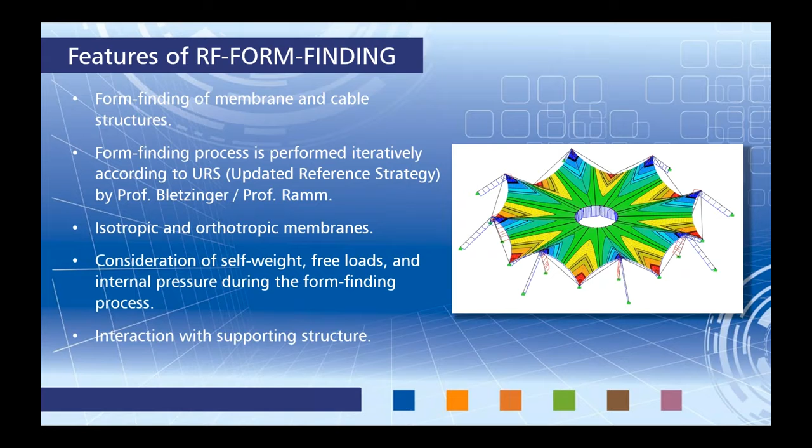Our other add-on module, RF-CUTTING-PATTERN, uses the minimum energy method for a very accurate cutting pattern. So essentially, we're turning this 3D membrane element into a 2D cutting pattern via the minimum energy method. We can also take into account uniform or linear compensation by warp or weft directions, meaning typically these membranes are going to be stretched when they're applied to our structure. So for the 2D cutting pattern, we can take into account that compensation.

We can also apply these compensations for boundary lines around the 2D cutting pattern, so it doesn't necessarily need to be in the warp and weft directions. We can also allow for different allowances, such as for welding and for boundary lines. Welding for overlapping members, maybe we need some additional material. Boundary lines for the upper and lower portions of the 2D cutting pattern as well.

There is adaptable data organization, meaning even after we have performed the calculation for our 2D cutting pattern, we could go back and easily add in some additional material for welding and for those boundary lines without having to recalculate the 2D cutting pattern.

And lastly, I'll show you how to output the cutting patterns both graphically within the RFEM printout report, as well as tables. And these tables can be exported directly to Microsoft Excel for further sorting. And lastly, we can export them as a DXF file, open them up in AutoCAD, and show you how to utilize the cutting patterns this way.

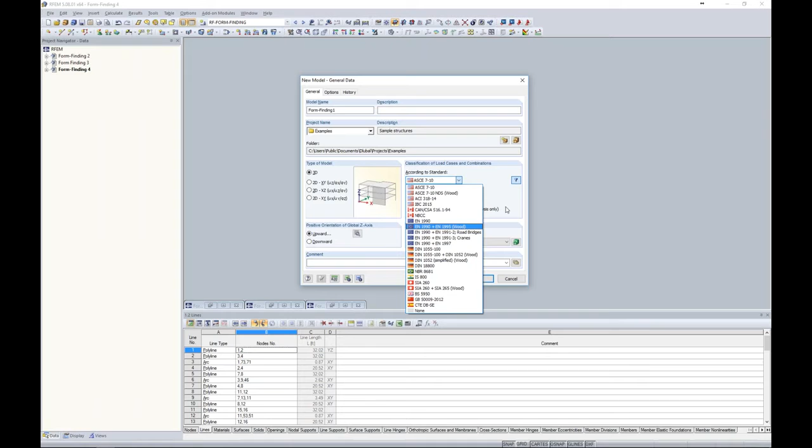So you can see from my drop-down box that I have the ASCE 7 load combinations. I also have our Canadian standard, Eurocode standards, and many other international standards. When I have this checkbox checked, then the program will automatically create those load combinations. You can see that when I uncheck this, then I can manually put in those load combinations if I'd like to as well.

It's important under the Options tab when we're utilizing RF-FORM-FINDING and RF-CUTTING-PATTERN to check on these checkboxes. Otherwise, we won't have those options within RFEM. So when you're checking out the form finding of our membrane structure, it's important to check these checkboxes, and then we can launch our model.

So up pops RFEM. And you can see here that we have our basic graphical display here in the center. We have our tables to utilize down at the bottom. Over on the left is our project navigator, which again just controls some of the input data. We'll also see our results available here. And lastly, we have all of our tools up at the top. And today we'll be using all of these options.

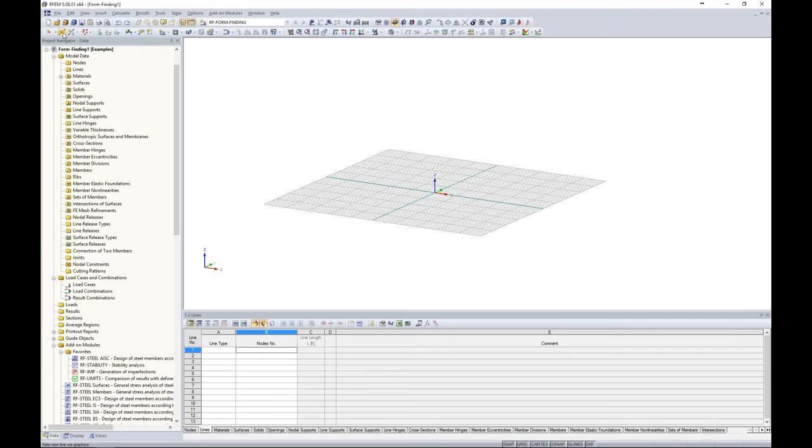I want to begin with drawing a basic line element. So up in my toolbar, I can choose to draw a new line, and you'll notice that we have many different line types. And you'll hear me say this quite often today, that we have a lot of AutoCAD-like capabilities within the program. So things like complex geometries, which is quite common for membrane type structures, is really no problem to model within RFEM. So hopefully you'll get a glimpse of that today.

To begin with, we are just going to do a typical straight line here, and I could draw this graphically in my graphical viewport over here on the right, but I can also just enter in a couple nodes here. So for example, 0, -5, 35, then I go down and click apply, and I can enter in my second node at 0, -30, and 15. And hit apply. So now you can see that we just have this line element in our 3D view over here.

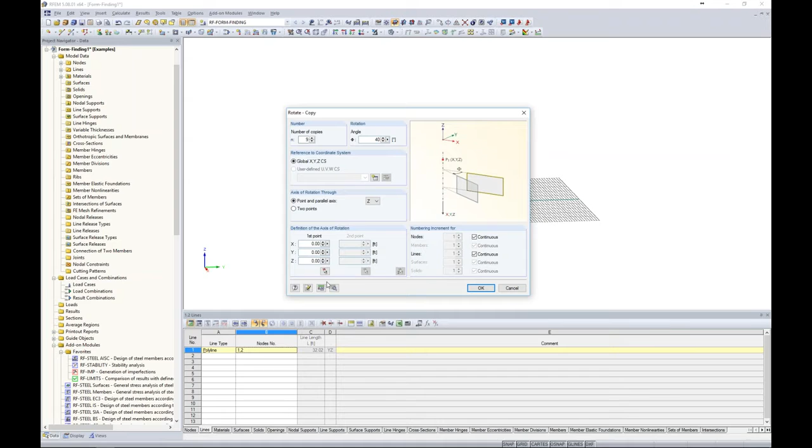I'm going to select this entire line and the nodes and use my rotate copy tool. So here I can specify that I would like 8 copies at 40 degrees, and I'm rotating everything about the origin 0, 0, 0. And even more so, we have a nice feature here down at the bottom. So if I click on this expanded settings, I can create lines between my copy nodes. Even more so, I can create surfaces between those lines. So now when I click OK through all of these dialog boxes, I have my conical structure with just a few clicks of a button.

Now turning this into a plan view, and maybe I turn off my grid down here at the bottom, I'd like to create cable elements spanning between my longitudinal lines here. Now a cable element certainly can't be constructed in the field as an arch type line like this. So we need to create straight lines here. Well, how to quickly do this?

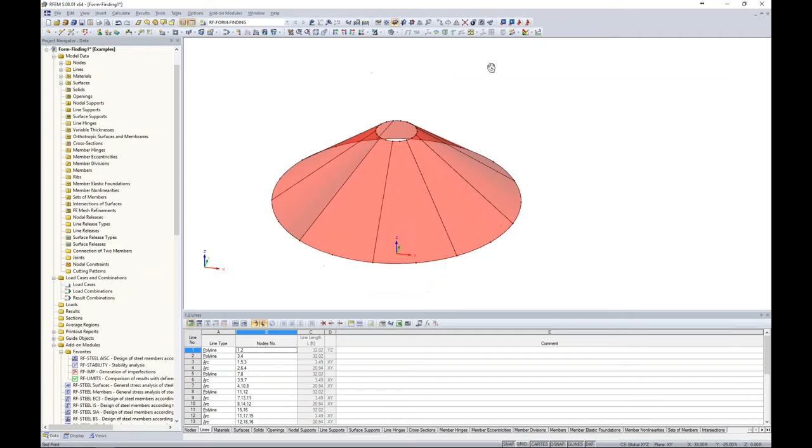I'm going to turn this into an elevation view, and I'll highlight all of my members down here at the bottom. Now you'll notice that my table 1.2 lines shows me exactly which lines I have selected in my graphical view. So using this feature within the table, I can show the selected objects only. So these are only my lines selected at the bottom of my structure. The line type right now is set at arc. I'm going to change this to polyline. Then using the F7 key, I can quickly copy that same setting down for all of my line elements here.

Now, if I turn this back to my plan view, you'll notice that these are now straight lines, but I still have this node in the middle that I'd like to get rid of. For this, I'll turn this into wireframe view, and now holding down my control key, all I need to do is to graphically select all of my nodes here. Then I simply click the delete key, and I have these straight line elements.

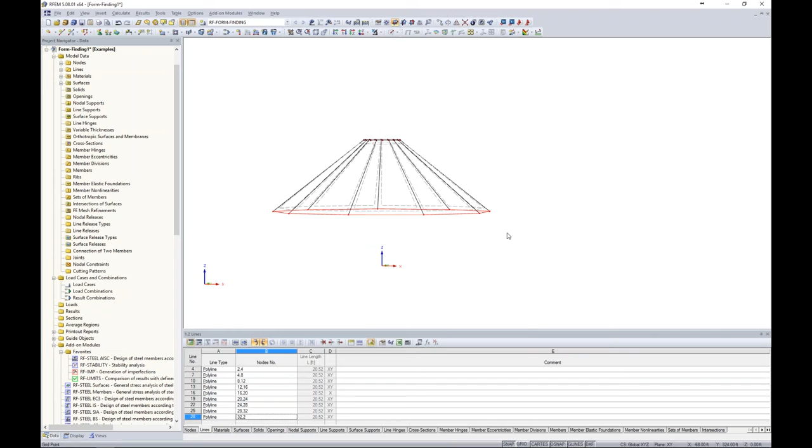So with these line elements, I'm again going to select them graphically down at the bottom, and I'm going to right click to edit the line. Now every member within the program is created with a line element underneath it. So we have a nice tab here up at the top called member, and we can create a member availability. Now up pops our new member dialog box, and we can create a new cross section.

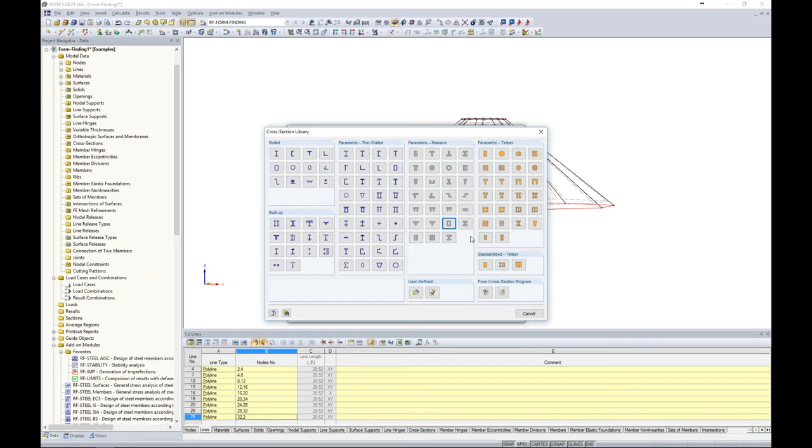So here I launch my cross-section database, and you can see that we have many different cross-sections, such as our rolled sections, built up, thin-walled, massive for concrete sections, timber. For these elements, I'm going to utilize the solid sections here. And we have our filters over on the left, which you can see some different producers maybe that are applicable to the Eurocode design. We also have our AISC database.

Now I can scroll all the way down to the bottom to choose a 1/2-inch diameter cable element. My default materials within the program are 4,000 psi for concrete and steel A992. I'd actually like to create a new material here, and my material database is brought up. This looks similar to my cross-section database as well. I have my filters over here on the left.

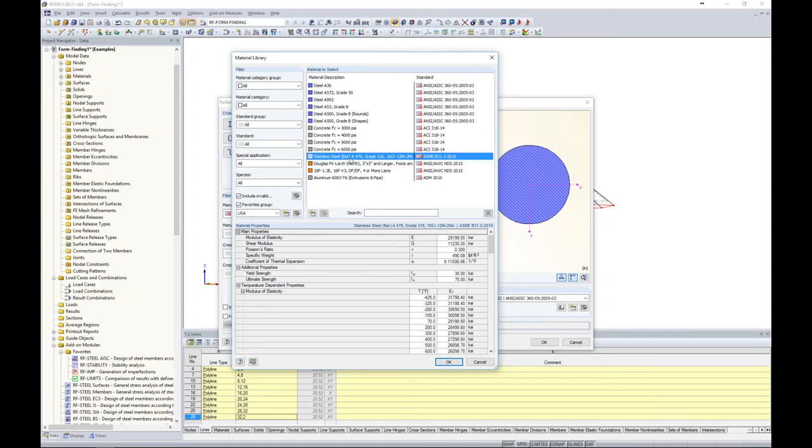So you'll notice that under material category, I'm going to change this to stainless steel. Now I have the ASTM as well as Eurocode down here to select from. Looking at ASTM, I have a very long list of all of my stainless steel materials that I could possibly think of. We can also utilize our favorites list, which I created a favorites list called USA. These are just common materials that I use quite often for projects, and you'll notice I added stainless steel A479 here. Well, I can select this material and click OK through all of these dialog boxes.

Now, the member type right now is set at beam. I actually want to change this to a cable member. That's the element that we're trying to model here. So now I can open up the member type. Now, this is available because I've activated that RF-FORM-FINDING add-on module. Otherwise, you wouldn't see this option available. Here we have the cable parameters for form finding. And with this, we either have geometry or force.

With geometry, we can set a target cable length or a target cable absolute sag, relative sag. With force, we can set a force in the cable or a force density. So these are the properties that we'd like to see after the form finding process is complete. When we're choosing geometry, this is maybe relevant for border cables and membrane structures, such as what we have today. The force is an option that's maybe relevant for cable webs. For our example, we'll choose a target cable absolute sag of 1.5 feet, and I can click OK.

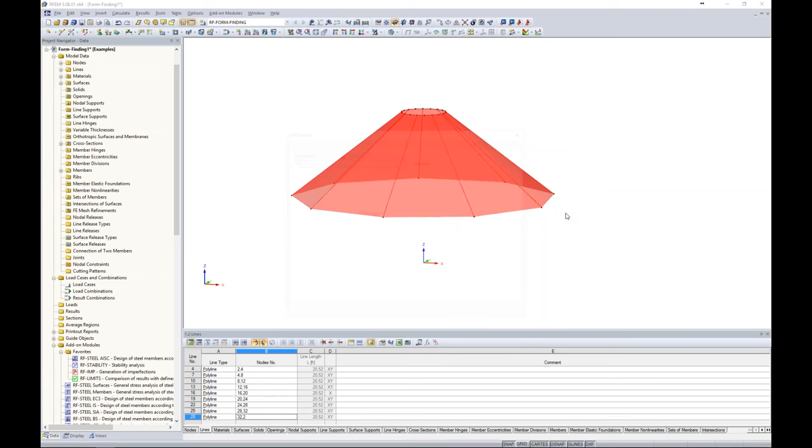So now that I have set this form finding capabilities, I click OK. And now we have the cable element specified down here at the bottom. So I want to turn this back into the rendered shape to show you guys that right now my surface elements are red. That means that there probably is something missing within the program that is trying to flag me. Well, if I highlight all of my surfaces, I right click and go to edit, you'll notice that my stiffness is set to null. Null means nothing. So we need to put in these material properties as well as our form finding process for our surface elements.

So the first thing I'm going to do is use my drop down to select membrane orthotropic. And here is where I'm going to create a new material. Now, membrane materials are not so straightforward as something like steel A36, A572, for example. This is something that maybe we get from the manufacturer, maybe we do our own testing on these material membranes. So when I go to create a new material, I need to first give it a description. And our material model by default is set to isotropic linear elastic. I actually want to change this to orthotropic elastic 2D. Now up pops my dialog box for my stiffness properties.

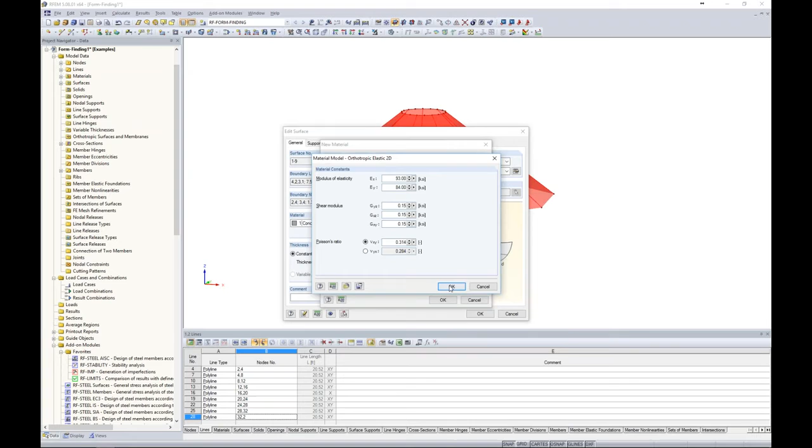So back in RFEM, we can simply apply those stiffnesses here. For example, it was found that EX is 93 KSI, our EY is 84. Our shear modulus is going to be the same in all three directions at 0.15, and our Poisson's ratio is also important at 0.314. Now I click OK. So we have now defined the specific material that we'd like to use for these surface elements. Now, similar to the cables, we'd like to edit the parameters of the stiffness. Again, these are options that are available, especially this form finding tab when we activate the form finding module.

The type we'll use here is constant thickness, and under my next tab, constant thickness, I'm going to set the thickness at 0.04 inches. Then I can click on my stiffness matrix to see those values here. Perhaps I'm interested in those. And under the form finding tab, well, this is the availability to define pre-stresses along the warp and weft directions with our form finding module. So you'll notice that we have two different calculation methods, both the standard and the projection. And this just comes from the general form finding method URS that I mentioned in the PowerPoint.

Standard is really used for membranes supported by points or arches or pneumatic structures. Pneumatic just means that they are air-supported structures supported by internal air pressure, which you can see down here is where we can define that internal pressure. Projection is used for conical shapes. So that's actually the type that we have today.

But just for example purposes, I want to show you what this form-finding deflected shape looks like by using the standard method to begin with. So you can see why we've chosen the wrong calculation method. So we want to define our forces, you can see down here, are defined according to the warp and weft direction. So this is the local X and Y axis.

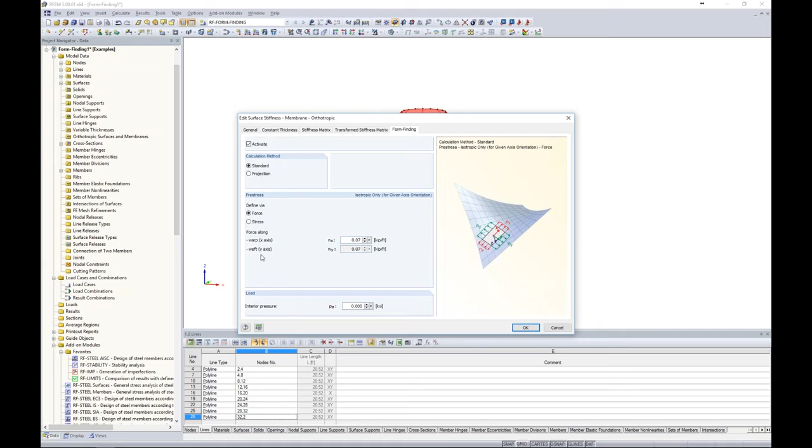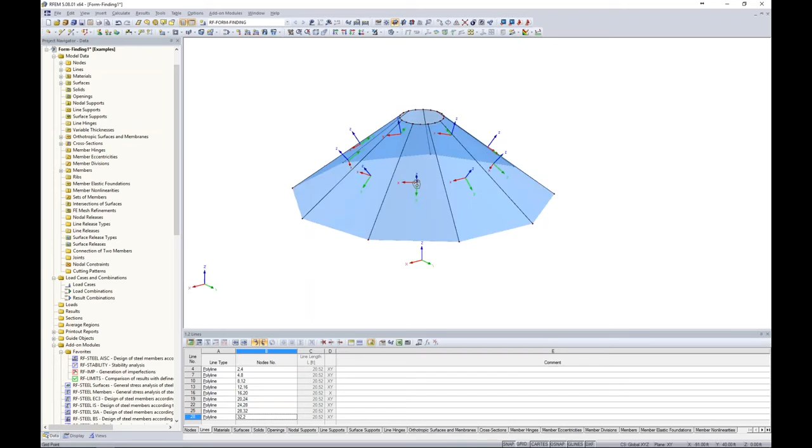Now, before I define these, it's very important that we go back to our model, and you'll notice my material is now blue because we specified these specific material properties, and I can right-click and turn on my local axes. Well, if we're going to define these pre-stresses according to the local axes, you'll notice all of my local axes are going in different directions. So this is not good if we're going to apply our pre-stresses globally to all of our surfaces, and yet they're going in different directions.

So how can we address this quickly without having to redraw all of our surfaces? Well, if I highlight all my surfaces, I right-click to edit them again. We have a tab called Axes here. Now Axes allows us to quickly rotate our local axes, and for example this third option down here, we can point all of our local axes direct to a line. Now this line can be a fictitious line within the model.

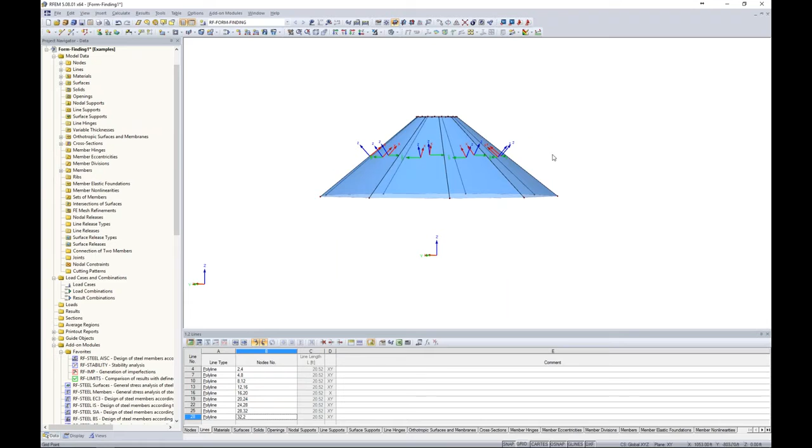Here for example we'll choose the origin as the bottom point, which is going right up the center of the structure, and our second point will be at the origin but at a Z elevation of 35 feet. So now when I click OK and I take a look at my local axes, all of those X local axes are pointing right towards the center of my structure. So this is very important when we're defining our pre-stresses for our surfaces globally here.

So now going back to our General tab and our Stiffness Parameters, under the Form Finding, here is where we can specify our force in the warp or the x-axis, and weft is the y-axis. This is also known as the longitudinal and transverse directions. So for NX, maybe we'll select 0.55 kips per foot, and we click OK.

So now that we've defined these pre-stresses, and I can turn back off my local axes, we'd like to run this form finding calculation. Before we can do so, we do need to support the structure somehow. Otherwise, we'll obviously get some type of instability. So just applying nodal supports at the bottom, I have my typical hinged support here. I can highlight over the bottom. I'll apply just a hinged line support at the top, nothing special here.

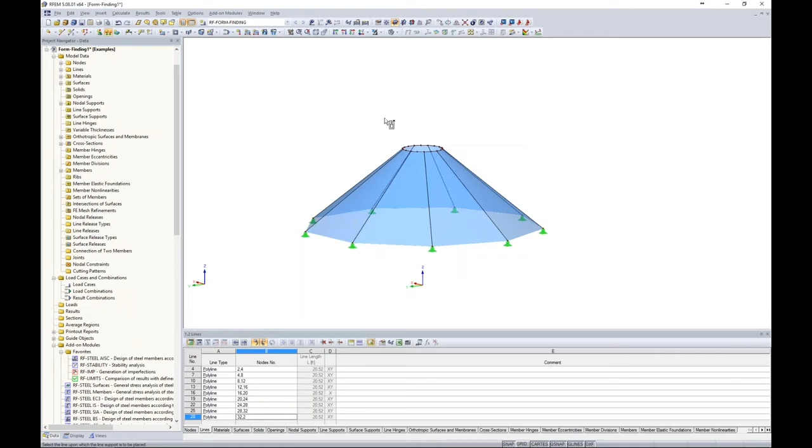So now with this RF-FORM-FINDING, we just click show results. It's asking me to start the calculation. That's fine. We're applying the URS method. Now remember, we are running the standard procedure now. So in just a few seconds, we'll get our deflected shape based on those pre-stresses. So as we can see for our conical structure, this is not the ideal shape that we would expect. So I think that should immediately flag us that, okay, we probably used the wrong calculation type.

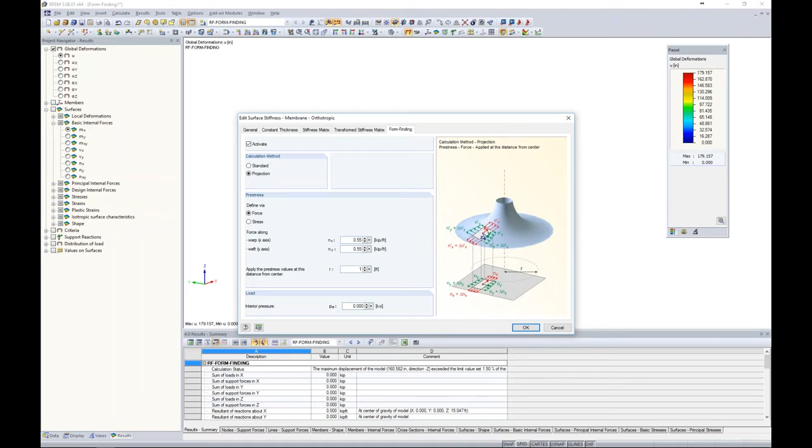So highlighting all of these surfaces again, we can right-click to edit it, go back into our form finding settings, and let's change this to projection. I need to redefine my NX and NY here. And it's also asking me where do I want to apply the prestress values from the distance from the center of the structure. We'll set this as 1 foot. I click OK. It's asking me to clear my results. That's fine. Now let's rerun the form finding process. So again, still applying those same pre-stresses, but we're using a different calculation type here to get our deflected shape.

And now we can see that this looks much better in what we would expect for our conical type structure. So what does this tell us? Well, in our results, which is now available in our project navigator over here, we obviously can see the global deformations in inches here in our contours, but maybe we're interested in the internal forces of our stresses here. So I take a look at my surfaces, and in particular NX.

Now looking at my contours, I see at the bottom I have a stress of 0.566. Well, this matches our pre-stress that we put on the structure for the form finding process, or very close to it. So that's great. That's exactly what we'd expect. Looking at NY, exact same scenario. At the bottom we have 0.53. We applied a 0.55 pre-stress, so that's about what we would expect.

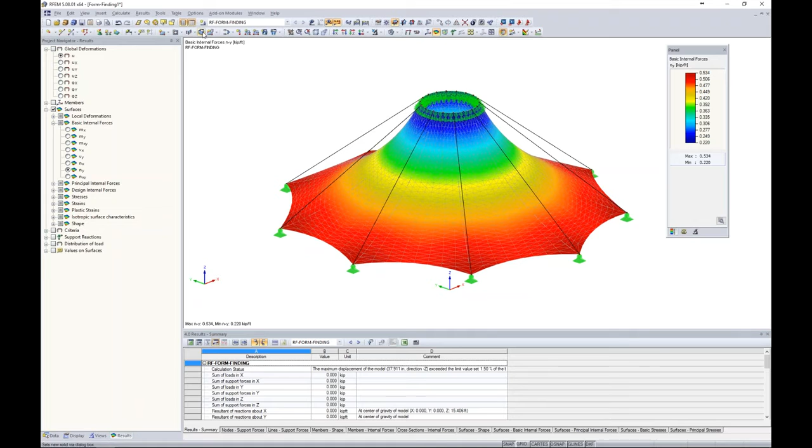Okay, so now that we have done the form finding process, it's time to actually apply some loads to this structure. Now, what we want to do is to maybe create a new load case here, and I can simply do this utilizing my tool up at the top, and I will give the first load case a description of dead load. Now, the action category is important because this tells us how we're going to apply these loads to the ASCE 7 load combinations, and in turn, which load factors should be applicable.

So we will keep the dead load for the action category. Self-weight is checked automatically for dead load, so this will account for our self-weight within this particular load case. For all other load cases, we'll leave this as unchecked so we don't account for it twice. We click OK, and now you can see that no loads have been applied to our structure yet, but using the new surface load, we can specify a load direction in the global Z,

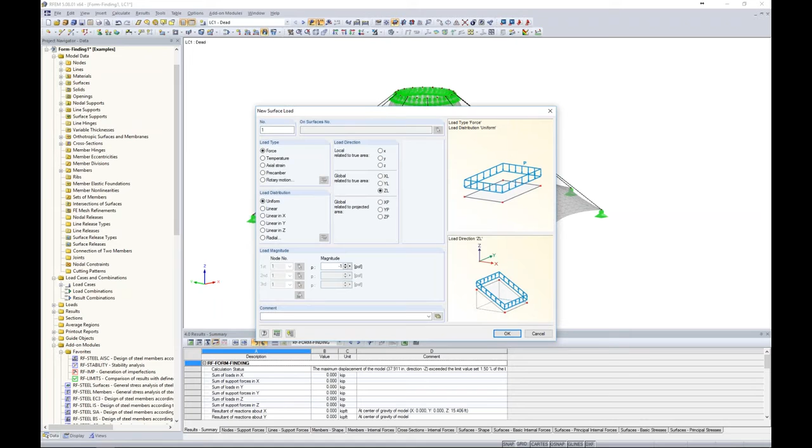and I'd like to apply a magnitude here. Now, let's say that this structure is just a basic canopy or something of the sort and really won't see too high of load. So you'll notice I have KSF, kips per square foot right now. Well, I can easily access my units and decimal places, and maybe I want to change my area loads to something more like PSF, for example. I click OK, so now I can apply -1 pound per square foot, a very, very small dead load to the structure.

I click OK, and then I can select all of my surfaces. So now you'll see that that dead load was applied to each surface. The hole at the top was taken into account. Everything was done automatically. Now, after dead load, we'd like to apply some wind loads. Now, wind loads for a conical type structure.

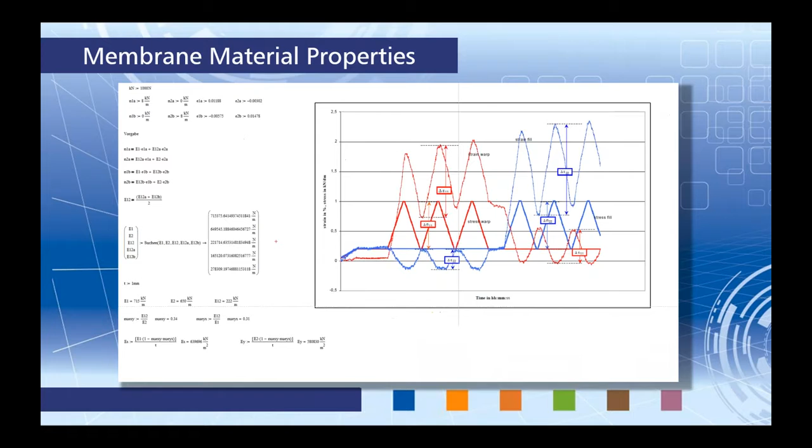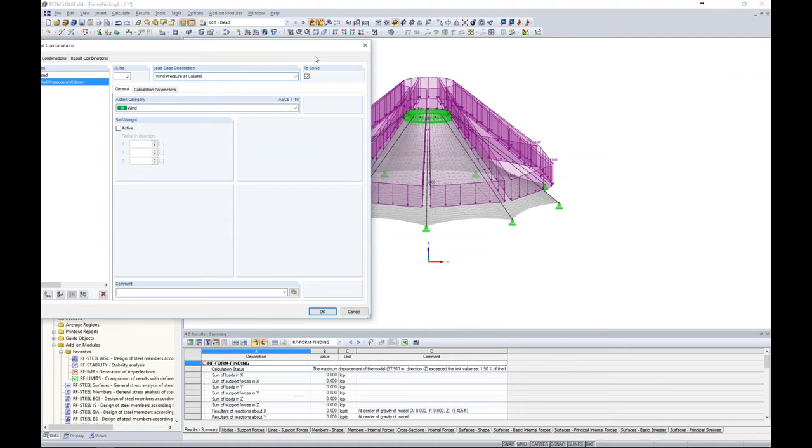I want to show you that it's actually not too complex utilizing some of the features in RFEM to take these different zones into account. So I'm once again going to create a separate load case here. The action category will be wind, and the description here will be wind pressure at column. Now I say at column because a little bit later on I will draw in 3 separate columns around our structure at 120 degrees. So this first wind load case will be that wind direction coming straight towards the column.

I click OK. So now that I'm in a new load case from my drop down here, I don't have any loads applicable right now. Putting this into elevation view, my first zone, zone D, from our table that we just saw is this front structure here, but it's actually 45 degrees around this front column. So what I want to do is I want to select this node down here at the bottom, and I'm going to use my rotate copy tool.

This time I'm only going to make one copy at 22.5 degrees. I want to make sure under my details here to clear out the settings I used before to create surfaces between my copied nodes. In the same sense, I'm going to do the same thing with my rotate copy tool in the negative 22.5 degree direction.

So for my wind loads, I previously used this new surface load, which will apply the wind load to the entire surface, which is not what I want in this condition. We have a nice feature here called free loads, which allows us to apply any different shape you can think of, whether that's circles, rectangles, or polygons, all to our surfaces. It doesn't necessarily need to encompass the entire surface.

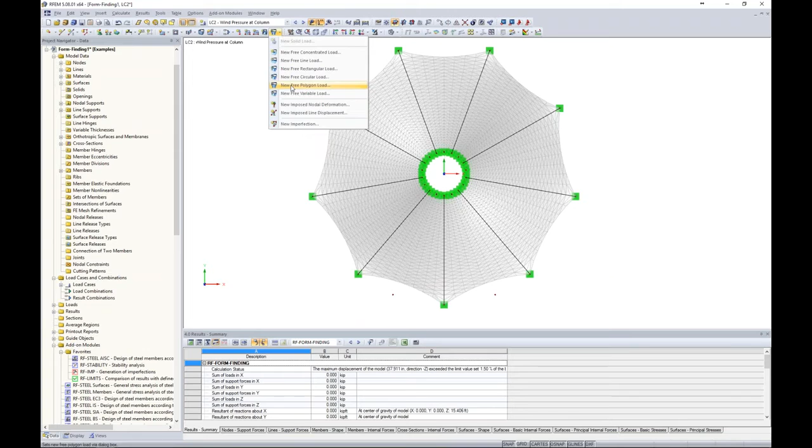For today, we will use a new free polygon load. Now for this, we just specify our surfaces. We can either select them graphically, or I can type in 1 through 9, or I could leave this as all. We're going to apply it in the local Z direction, which is normal to the face of the surface according to the local axes rather than the global.

The magnitude here I determined from that table will be -9 pounds per square foot. Then I just select graphically my different nodes that I would like to apply this wind load to. I click OK, and now you can see that this wind load pressure is applied to the front of my structure, but not on the entire surface elements here.

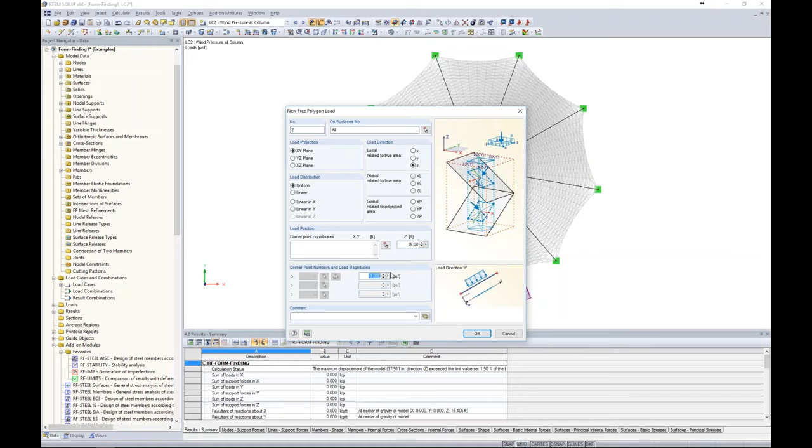Now, in the same sense, I'd like to do the same thing at the rear of the structure, but at 120 degrees. So I'm going to again use this polygon load here, in the local Z direction. I'm going to change my magnitude to 8 PSF, and then click on my different points at the rear of the structure. I click OK, and now we can see there is a surface load being applied to the rear of the structure. And I just realized that I made a mistake.

Looks like I applied this to surfaces all. It's the same thing - you can leave it as all or type in surfaces 1 through 9, but you can see the display is a little bit different. It goes back to being projected. We can project down through multi-level story buildings as well. But just for display purposes, I'm going to select this as all so that it's very clear this is a suction pressure at the rear of our structure.

Now, in the same sense, I'd like to apply my other zone on the right side of the structure. So we again use a polygon load, typing in surfaces 1 through 9 in the local Z direction. My magnitude changes to 12 PSF - this is my highest load around the circumference of the conical structure. Then I select my points.

Now, something to note here, I would like to encompass half of this surface. The program has snap settings, just like what you would see in AutoCAD, so it recognizes that this is the midpoint of that surface. Instead of creating a new node like I did previously, I can just use this snap point. I click OK, and now you can see we have that suction on the right side.

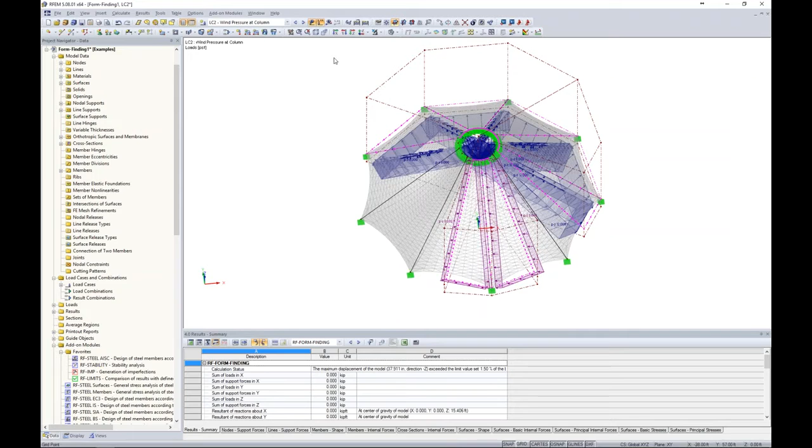Now, lastly, we have a small zone here to do the exact same process. Surfaces 1 through 9, my magnitude is changing to 5 PSF, and I click on my remaining nodes on the right side of my structure.

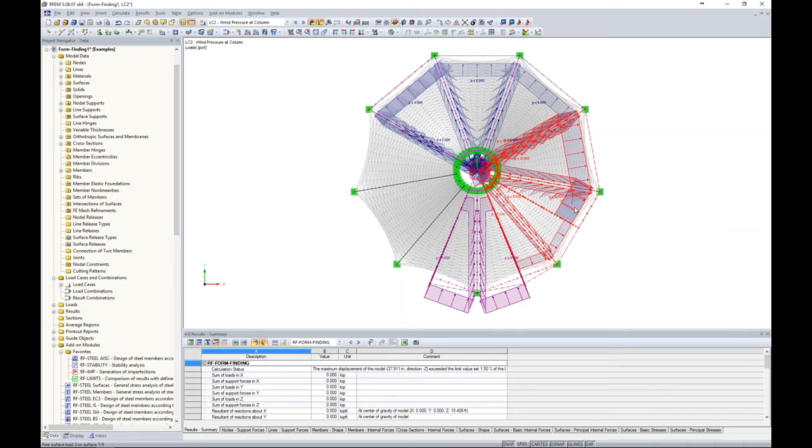Okay, so now that we have these suction loads on the right side, we could do the same process for the left side, but I really want to show you those tools that make modeling a little bit more efficient. We have a symmetrical structure here, so what we can do is just hold down our control key to highlight these two loads over here on the right and use our mirror tool.

Mirror is something that you would find in AutoCAD. It's also available in RFEM where we can create a copy. We can mirror about the global axes and the origin. I click OK, and now you can see that those loads are generated on the other side of the structure. So essentially you can see how a very complex load can be quickly drawn within the program, especially for these conical type structures and membranes that would normally be very complex.

As I mentioned in the PowerPoint, we want to take into account both pressure and suction from this front-facing wind direction. I can go back to my load cases and combinations and create a copy. Instead of wind pressure, we'll call this one wind suction. I click OK. Now my loads look exactly the same, but I want to double-click my load at the front and change this to a magnitude of 7 PSF to account for that suction instead, so just a different load case. Now we have our wind loads for both pressure and suction.

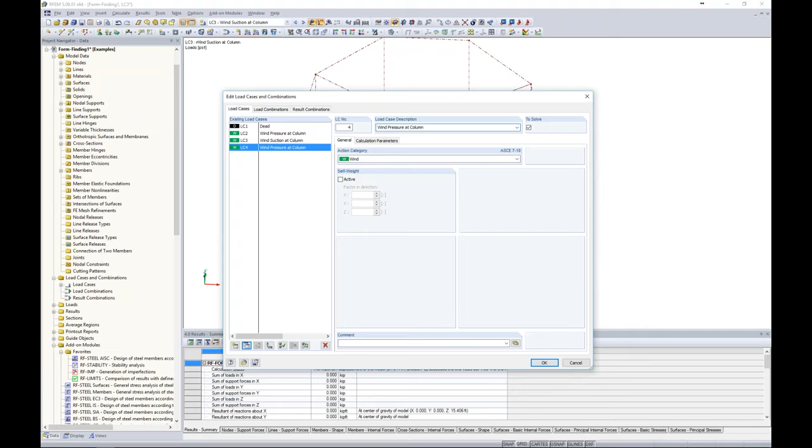Perhaps I'd like to take into consideration if the wind load shifts at any point along the structure. What I'd like to do again is go back to my load cases, choose my wind pressure at column, and create another copy of this. This time, instead of at the column, I'll call this one between column. I click OK. So what I'd like to do is shift all of these loads 60 degrees over from where they're being applied now.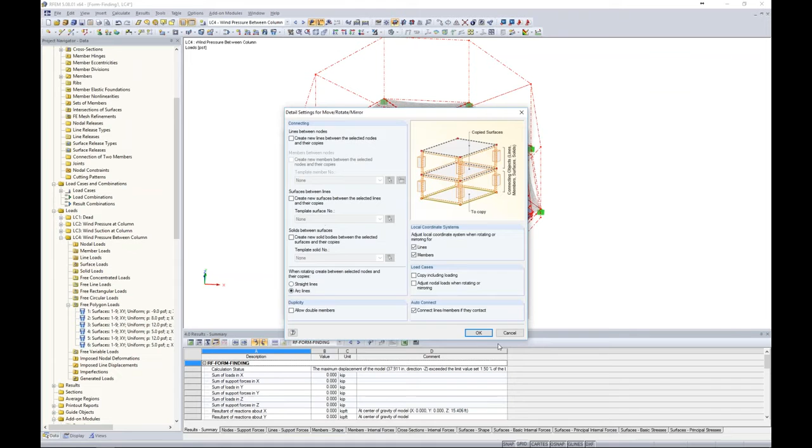For this, I'll utilize my project navigator on the left. This has all of my input data, just like my graphical view and tables do as well. If I scroll down to my loads tree, I'll see my 4 different load cases. In LC4, I can expand my free polygonal loads. Here I can use my shift key to select all my surfaces, which are highlighted graphically. I'm going to use my rotate tool. I'm not going to create any copies, and I am going to rotate it 60 degrees, making sure everything is clear in my detail settings. I click OK. Now you can see everything was just shifted over 60 degrees. Everything was taken into account automatically for our surface load application, and that's all we need to do.

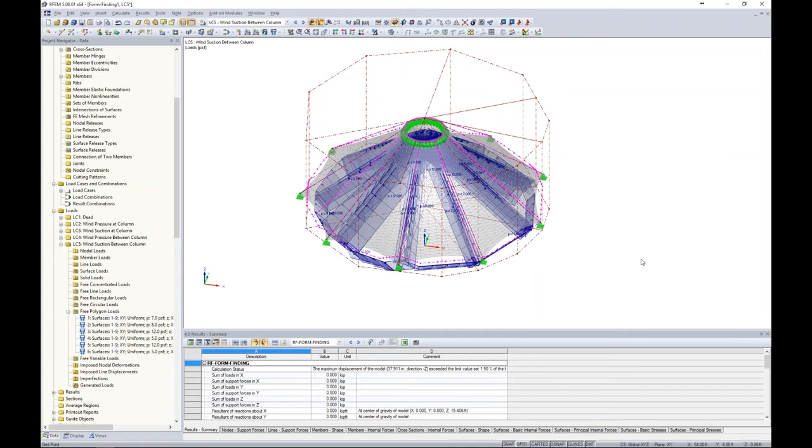Going back to the load cases, I do the exact same thing, but for wind suction at column. I create a copy, rename it to between column, click OK. Then here I make sure that under my tree settings for loads, I'm under LC5. I select all of my free polygonal loads, use my rotate copy tool to make a rotation of 60 degrees. I click OK. And just like that, all 4 of my load cases are complete for my wind loads.

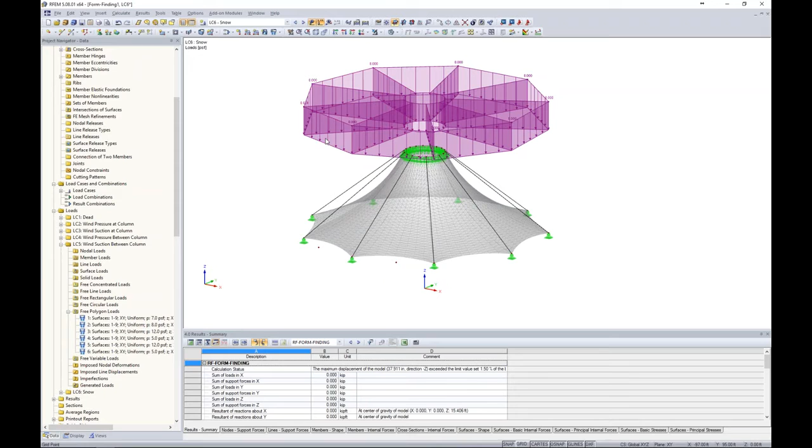Now, lastly, I'm going to create one more load case, and we'll call this one snow load. The action category will be set to snow. I click OK. Now, because I didn't create a copy of any of my previous load cases, I should have no loads in this particular snow load case right now. For this, I'm going to go back to our new surface load. I'm going to apply it in the projected Z direction with a magnitude of -8 pounds per square foot. I click OK. I can select all of my surfaces graphically, and here's my projected snow load again with that opening taken into account and all of my surfaces. So that's really all we have to do in terms of our application for our loading.

Taking a look at our load combinations now, it looks like I forgot after the fact, which is no problem. Going back to my form finding, I can right-click under my general data. I left this as unchecked, but I want to check it because I want my load combinations to be created automatically. So you can see that you can always go in afterwards to select that or unselect that.

Now going into my load combinations, I take a look at my actions and I'll see that I have dead load, wind load, snow load. Dead load and snow load are pretty self-explanatory, but wind load, we have 4 different load cases here. So how is the program going to apply these to the ASCE 7 load combinations? Right now it's set to alternatively, meaning it will be LC2 or 3 or 4 or 5. We can also choose simultaneously so that all 4 load cases act at the same time, or differently. Differently means the program will come up with every different combination with these 4 load cases, such as LC2 plus 3, 2 plus 3 plus 4, 2 plus 5, and so on.

So you do have control over those different action categories. Now, combination expressions, automatically the program will create our LRFD load combinations as well as our ASD load combinations.

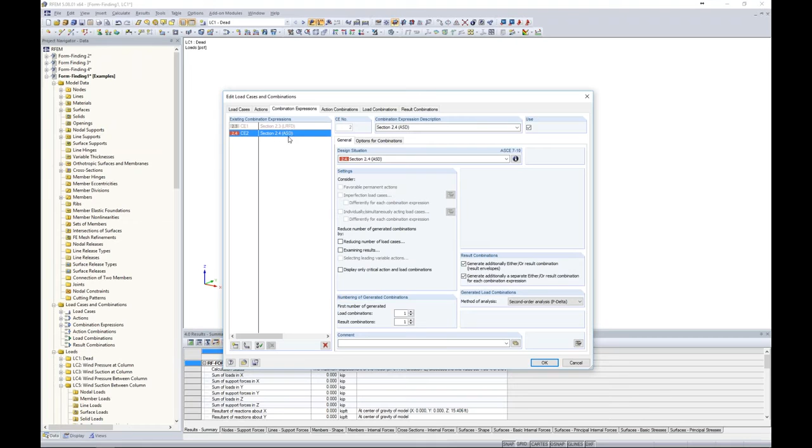Let's say for membrane design, I'm not interested in applying my LRFD load factors. So what I can do is just uncheck this for now. I'd rather just generate the ASD load combinations, and I can click on my info button here to see that my load factors are more around 1.0 that I'd like to use for my membrane design.

So then under the load combinations, you can see the program automatically generates our ASD load combinations based on the existing load cases in the program. And lastly, we have our result combination, which is nothing more than an envelope solution for all of our ASD load combinations. Now I can click OK.

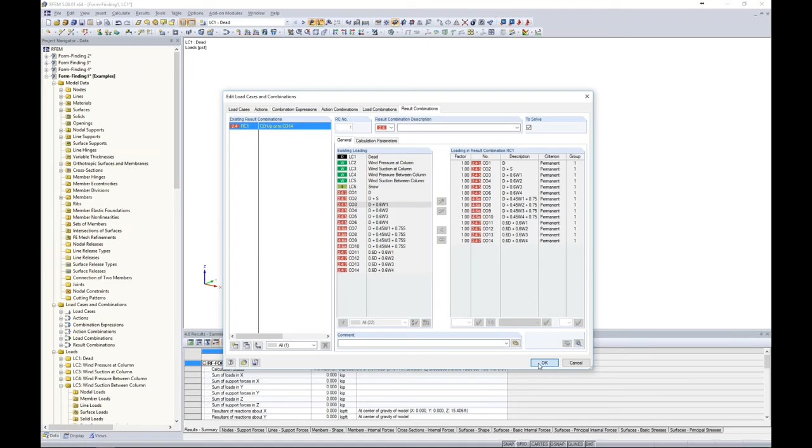So let's run one single load combination here just to view how our results will look. So what we're going to do is we're going to utilize the RF form finding deflected shape, which we've already done, and just apply dead load to it. And you can see that solves rather quickly.

Taking a look at our results now, it looks the same as what we saw with RF form finding, but now we should obviously see some higher internal forces and such. For our membrane here, we can view our NY forces, our NX forces, for example, in kips per foot as contours.

Remember, we have our cable elements down at the bottom, so I can view my members and in particular my internal axial forces for those cables at the bottom of my structure here. So that's what's available in terms of solving for the analysis only within RFEM.

Now for membrane design, you could take these internal forces, maybe you have an Excel spreadsheet that you use, or you do some hand calcs to do design of the membrane. I want to show you our other add-on module in the program that we can also utilize to do some design checks for our membrane elements.

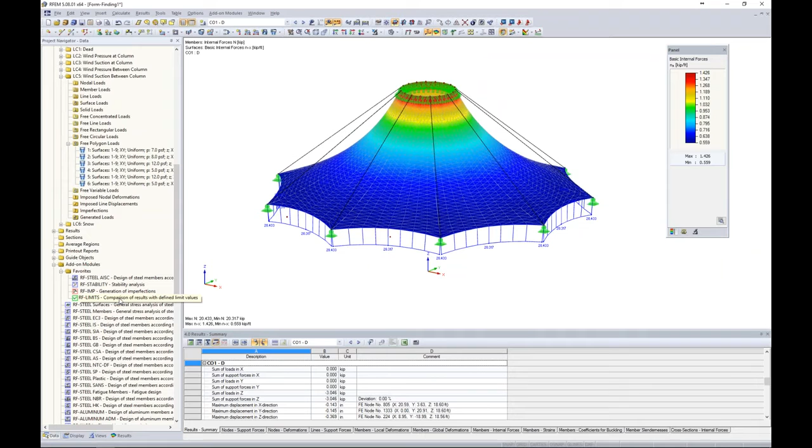For this, we will launch RF limits. RF limits is pretty straightforward. This is an add-on module, and when I say add-on module, it's nothing more than just a dialog box that pops up within the program. We don't need to remodel anything.

All that we're doing here is specifying some limit parameters so that the program can give us a design check based on internal forces to design capacities. So for this first case, let's rename this case, and we will call it max dead.

I click OK. So perhaps for this particular membrane, after our testing, we found out what the max NX and NY internal forces should be, meaning that the material should not exceed these internal forces, otherwise it's going to fail. So we have some specifications for dead load only now. So we're only going to check dead load, and I move on to limit parameters.

So my limit description, I can just call this one membrane. Now the object type, I'll select surface here. Now I can either select these graphically, my surfaces back in RFEM, or I can just type in 1 through 8 there because I know I have 8 surfaces. And then here is where I can select my limiting internal forces.

For example, I have my NX force here. When I check this checkbox, the program allows me to input in some ranges. Let's say we've determined that the max value for dead load should be nothing more than 0.43 kips per foot, and I want my range to be somewhere in between this range.

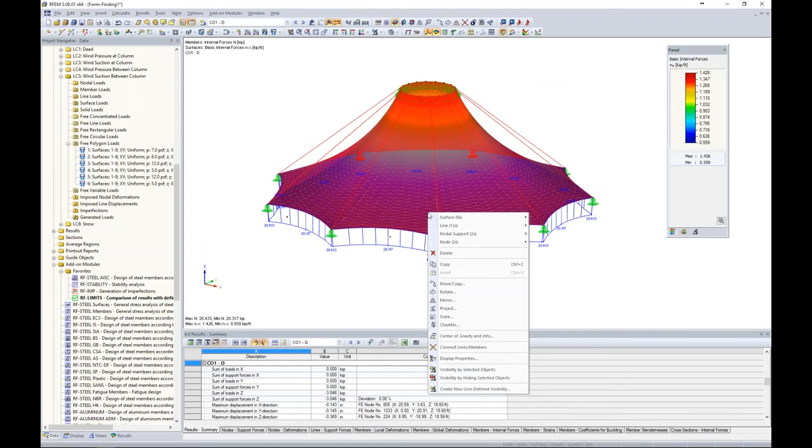So what can we do to maybe change this? Going back into RFEM, remember that I had defined my pre-stresses, which we can edit here. Take a look at our form finding tab. These are set at 0.55 kips per foot.

Well, maybe I've determined that this is a little too high for my pre-stress forces. So let's change this down to something like 0.14.

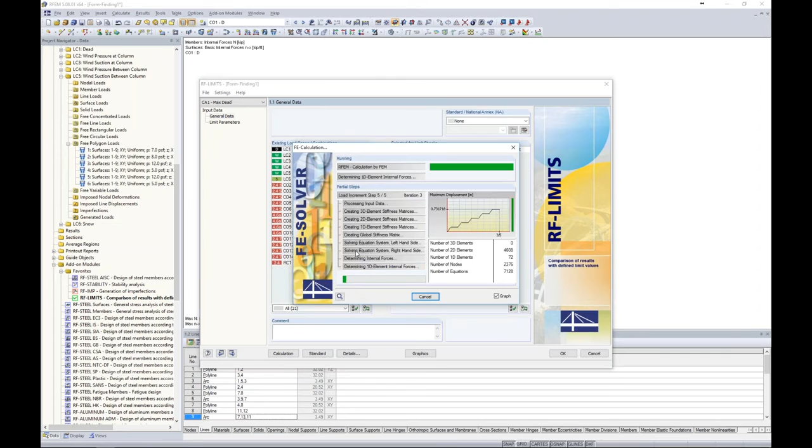And we click OK. So now you'll notice it's asking me to clear my results. That's fine. We've lost our form finding shape. That's no problem. We can rerun that here within RFEM, but if I just go back into RF-LIMITS and I click calculate, the program knows that it needs to recalculate the form finding, then apply the dead load combination to come up with those new internal forces, bringing those internal forces into this add-on module to compare to my limiting values.

Now you can see that we're around 0.409. That's within my range, so I get a design ratio of 0.95. So that looks good. Now I can also view the limit checks by surface. So we have our table here of all of our different surfaces. What's nice is that as I'm scrolling down through this table, it is synced up to our graphical view within RFEM, so I can know exactly which surface I'm looking at.

So that's good for dead load, but obviously we have a lot more load combinations that we need to take a look at. So let's create a copy of our case here, and this time we'll call it max total. So now for my max total under my general data, I have my controlling internal forces, my capacities for everything that should include dead load and snow load and wind load. I've already checked my dead loads. Maybe I'm not concerned with that, but I'll move the rest of my load combinations over here to check for my calculations.

Now my limit parameters, again, I made a copy so it remembers all of my information from that last case that we just did, but I probably want to change my maximum values here since we're applying a lot more load. For example, NX max might be something like 1.26 from our testing. And NY max might be something like 0.95 kips per foot, and now I'm ready to rerun that calculation.

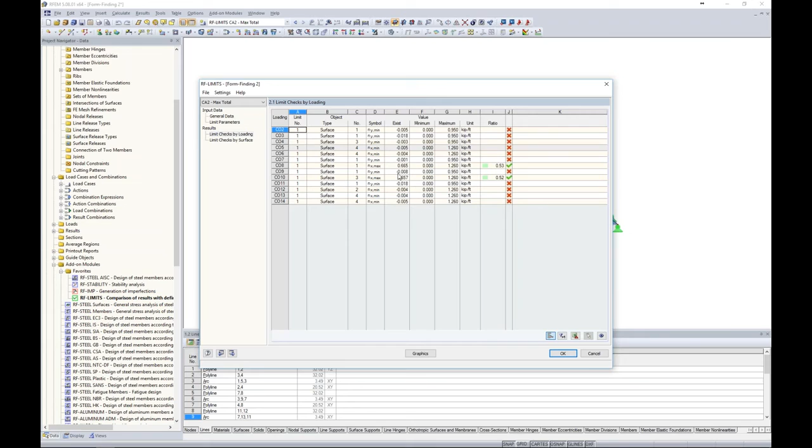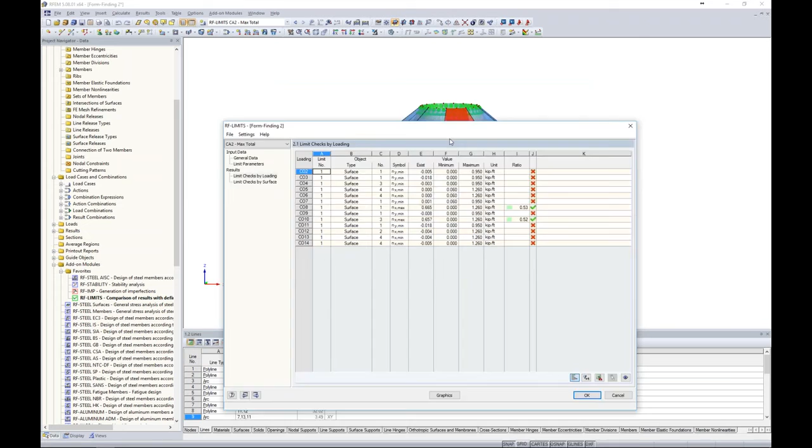Well, again, I'm seeing a lot of red here, which probably tells me there's some type of problem going on. But I look at my ratio, and I don't even have a ratio shown. Well, why is that? Looking at the existing forces, I have compression forces, and they're very, very small. So what exactly is going on here? Realistically, from the applied pre-stresses and my form finding, everything should be in tension, at least what I think. So there's something that I'd like to point out that we need to take into consideration.

Back under the General Data tab, we have this detail setting here. And you'll notice that default is continuous within surfaces. So what the program does with internal forces, but also with deflections, with stresses, with anything that we can view graphically, it uses a smoothing algorithm to tie all of these values together so that we can make sense of it when we're viewing it in RFEM. Otherwise, it would just be kind of random numbers, not really tied together with these nice contours that we could view. But that's fine for viewing purposes, but sometimes it's not okay when we're doing design, such as this case. The other option here is constant on elements.

So it will not use a smoothing algorithm to tie all of our internal forces for a single surface together, but rather it's going to take internal forces from each FE element into the program. Now, there really isn't a right or a wrong way to do this. It's just purely how you're viewing your results differently within the program. So by choosing constant on elements, we're foregoing that smoothing algorithm to make everything look nice and pretty, but rather just bring in the actual internal forces on each FE element.

So now when I click OK, it's asking me to clear my results. I can rerun the calculation, but what's nice is it only takes a split second because the calculation's already been run.

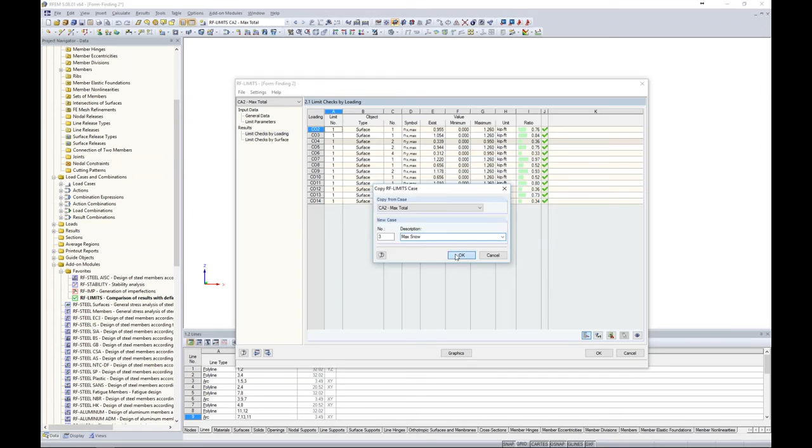Okay, so we want to create one more copy of this case, and this one we will call max snow, for example. And going back to my general data, I'm going to move all my load combinations over here. Maybe I want to check dead load and snow load only because we have some different capacities for snow loads being applied. My limit parameters, perhaps I'd like to set this, done from my testing, to 1.00 for my NX, and my NY will be 0.72 kips per foot. I can run calculation.

Internal forces are already there, so it brings them in here. It looks like we're at 0.96, so we're below that 1.0 ratio, so that all looks okay. So I'd say that our membrane design per ASD load combinations is pretty much done. But remember, we did have those cable elements in there. Well, we can use RF-LIMITS to check our cables here as well.

So for this, I'm going to create a new case, not a copy, and you'll see why, that we'll call this one cables. Now, I can use my result combination here, which again is nothing more than an envelope solution for all of these load combinations. If I want, I can move all of these load combinations over here in place of this one, or both of them. This is the same thing, it just simplifies our results a bit.

Looking at limit parameters, this time we'll call this one cables. The object type here is member. Remember that we have 9 different member elements within the program. Those are our cables down at the bottom. And here we'd like to check our normal forces within those cables.

So keep in mind that these are being designed per ASD, so probably later on we'll come back and check these against our LRFD load combinations, which are more typical for design rather than ASD. But just to double check, for now, if we weren't passing ASD, we certainly won't be passing LRFD, and it looks like we have a ratio of 0.77. So everything looks good so far in terms of our code checks or our design checks for the ASD load combinations.

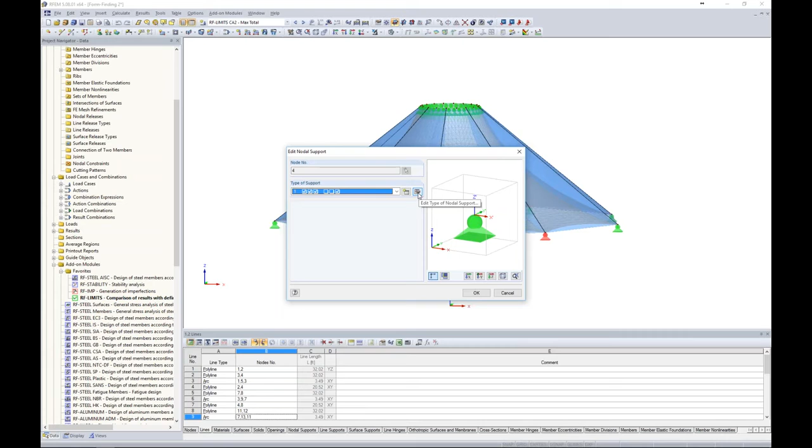Okay, so now that we've completed the membrane design, let's consider the supporting structure. The membrane design is great, the cable design is great, but maybe we'd like to incorporate it with the rest of the structure here, all within one model. So what I'm going to do is get rid of these supports, but before I do so, I want to double click and show you an interesting feature that we have. We can edit this support type or create a new support type, and of course we have our translation and rotation for our restraints. We can also put in some partial fixity here with spring constants, and then we have our nonlinearities.

And in my drop down from my nonlinearity, you can see that I have this option called form finding stage only. So what this allows us to do is to apply these support conditions only to the form finding process. Then when we move on to, let's say, our ASCE 7 load combinations, those constraints are no longer taken into account. They don't exist at all. So this is almost like a construction type phase that we can automatically account for within the program. So just a nice powerful feature rather than manually having to do this.

For our case today, I'm going to use my project navigator though and open up my nodal supports. I can right click just to completely delete them. I'm going to do the same thing with my line supports, right click, delete. And now putting this into plan view, I'd like to create a ring type member at the bottom of my structure here.

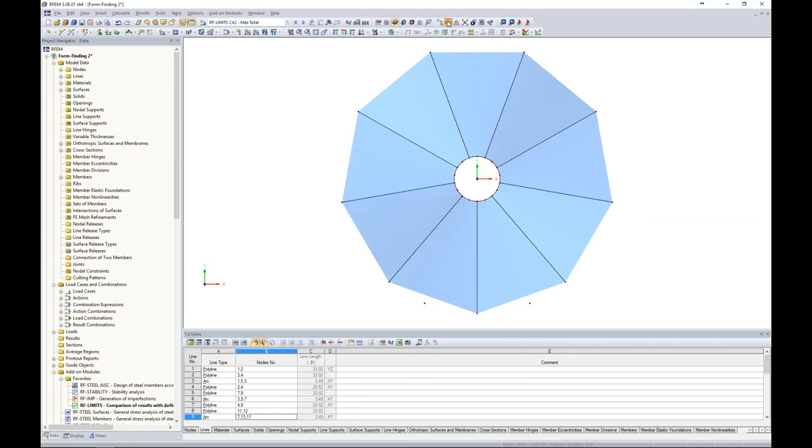Well, I can easily do this by highlighting my node down at the bottom and once again going to my rotate copy tool. Here I'm going to create 3 copies at 120 degrees. And in my detail settings, I'm going to select the option to create a line between the node, but I'm also going to create a member between the node. So when I check this checkbox, I can create a new member type.

Now the member type is beam here. This is just any typical type beam or column element within the program. We're not working with cables or anything anymore. So I open up my library for my cross sections, and here is where I can select my circular hollow sections. Again, using the filters on the left, we have the AISC, we have our Canadian sections, as well as many other international standards. For today, we will use an HSS 10.75 by 0.25.

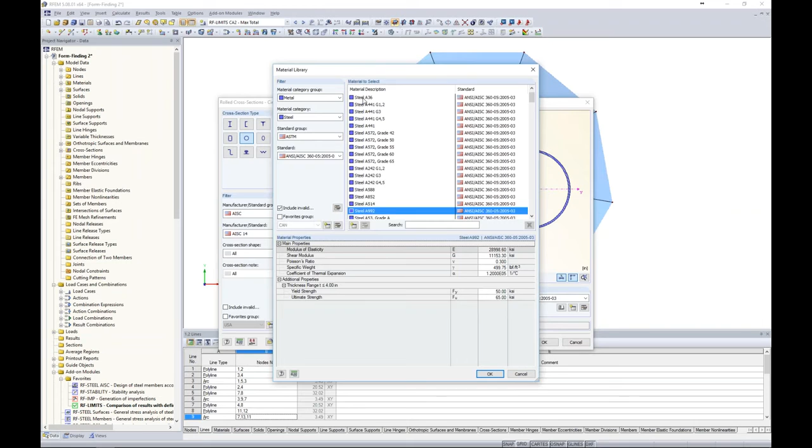Now, the material is steel A36, so I want to create that new material. Utilizing my filters, I see steel A36 up at the top here for my ASTM. I click OK through all of these dialog boxes, and then I see my beam automatically generated around the bottom of the structure. So that was fairly easy.

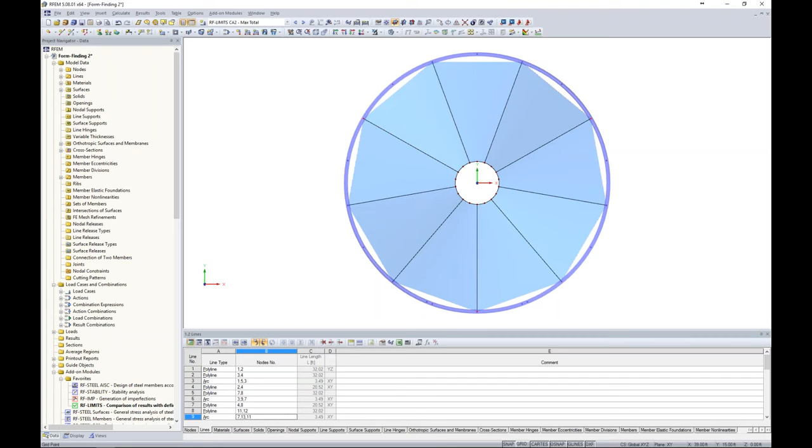Now, in the same sense, I'd like to create my 3 columns that I mentioned before. So we'll have a column here up at the front and a couple columns here in the back, all 120 degrees apart. So you'll notice I held down my control key to select these 3 nodes, and I'm going to utilize my move copy tool. We will create 1 copy in the negative 15 foot global Z direction. Now, I'm utilizing this feature just to show you some different options within the program. You could easily draw in these columns with a couple clicks too by drawing in a new member. So this is just one other way to do it.

Under the details settings, we'll utilize the copied lines and members between the nodes and create a new cross section here. So I want to utilize an HSS section, but I'd like to choose a slightly smaller section. We'll choose 8.625 by 0.25. Now, steel A36 I've already defined within the model, so now I'll always have this option every time I go to draw a new member. I select steel A36, I click OK.

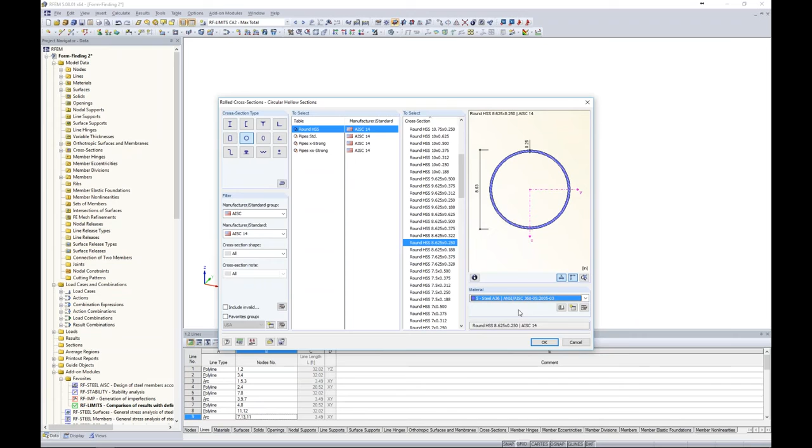I would like to have a member hinge up at the top, so I'd like the moment to be released at the top of my columns. Well, for this, I can easily create a new member hinge here. I get a nice little picture showing me exactly what my local axes are. The program suggests, well, you probably want to release your Y and Z axes, and that's correct. I'd like to release those for my moment.

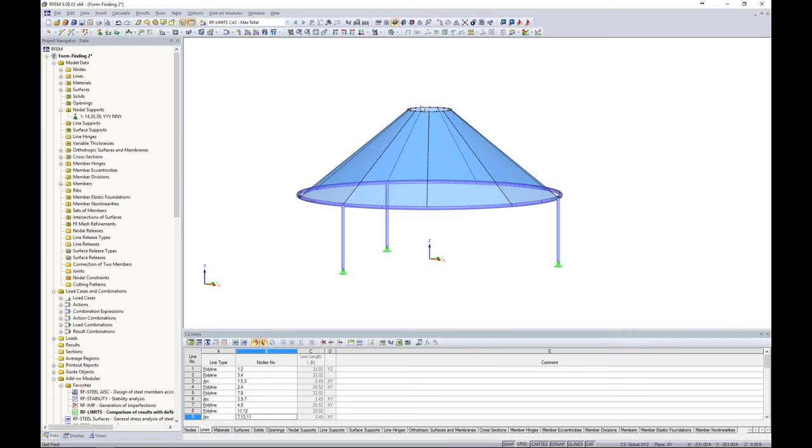And you also notice, just like our nodal supports and line supports, we have spring constants here for partial fixity, and we can also get into the nonlinearities such as partial activities, slotted joints, things like that. For us, we're just applying a simple moment release. I click OK through all of my dialog boxes, and my 3 columns are created. Then I can apply nodal supports in a similar fashion like what we did before, just to the bottom of the structure.

Now, I want to continue modeling because obviously the center of our structure is not supported, but for this, I'm going to jump to a saved model just for time purposes. You'll see that I have created this column up the center of the structure. I've added some braces to my outer columns here. If I zoom in up to the circular opening, I applied an MC shape, 8 by 20, to that exterior circle. And lastly, just some flat bars to tie it to that center column. These flat bars are just 1" by 8" bars. So you can model in the rest of your structure here with any type of materials, whether that's aluminum or steel, to account for the supporting structure.

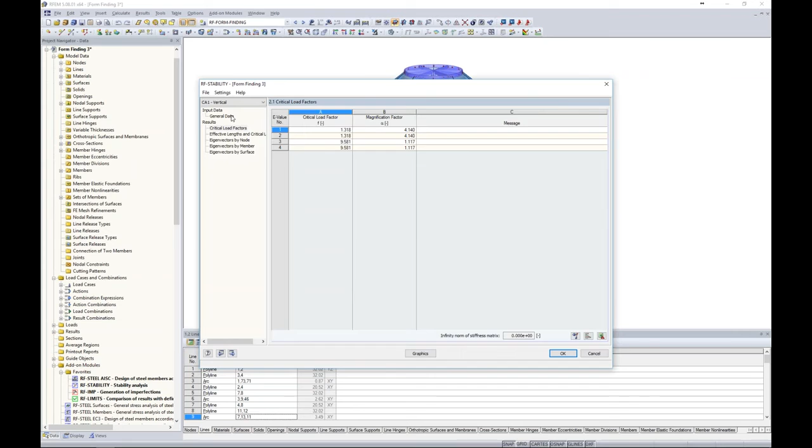So how do we utilize some of our other add-on modules to do a complete design of our membrane structure? Remember that we've already done the membrane design, which you can do so with this structure that I'm showing you right here. But let's take a look at our other add-on module, RF stability. So RF stability is pretty powerful in the sense that we can do a stability analysis to show our different buckling shapes from an applied load. For example, I created this first case here called vertical.

I applied my load case dead load. Then when I run my calculation, I get my critical load factors for my structure. So this is based on the buckling behavior of my entire structure with 4 different buckling modes. I can view this graphically, which I think might be a little bit more interesting.

So based on the applied dead loads, for example, I have my eigenvectors here, only to a max of 1.0 in their unitless form because it is an eigenvalue analysis. And I can view my different mode shapes. I only solved for 4 mode shapes here, but I can view the different buckling shapes.

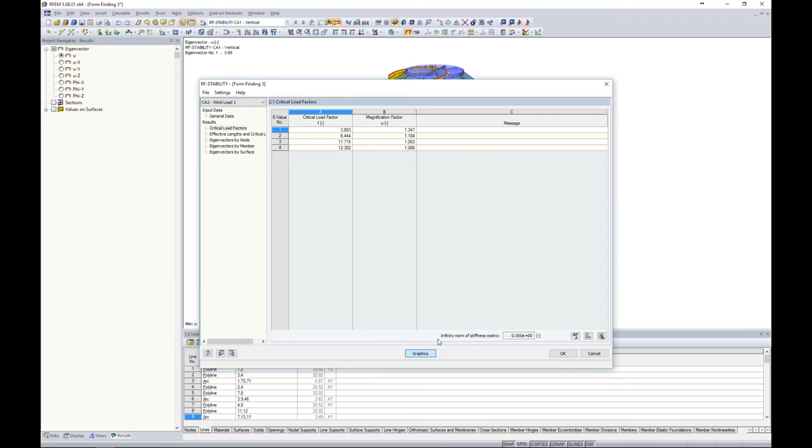Now, in the same sense, going back to RF-STABILITY, I have created a second case here called wind load, and I imported my load case number 2, my wind pressure column. I run my calculation, I get my critical load factors for now my first wind load case. Again, I can view all of this graphically to view the different buckling modes. So just quite interesting to show you what the behavior of the structure is under those applied dead loads and wind loads. So why do we do this?

Well, back under data, we have another add-on module called RF-IMP. RF-IMP allows us to apply imperfections to the structure. Now, imperfections can be related to the AISC, Chapter C, the direct analysis method, where the code tells us that if we want to apply things like notional loads, for example, to account for column out of plumbness or member out of straightness, we can apply imperfections and manually model these types of imperfections.

It's certainly important in Eurocode, as the Eurocode calls for imperfections within all of our load combinations. AISC is not so straightforward with that. It kind of really depends on some different factors, but regardless, it can be applied for all design no matter which standard you're looking at.

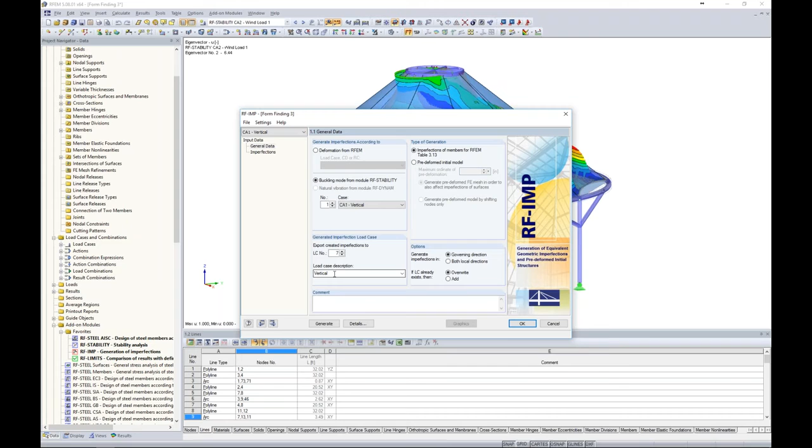So when we're looking at RF-IMP, we can actually import the buckling mode from RF-STABILITY. So that was what we were just looking at in our other add-on module. You can see all of my different cases here. For example, my first case, vertical. Now I can export those imperfections that are being generated by RF-IMP as a load case. So load case number 7, and I've named it vertical. So once I click generate, what exactly does this look like?

Well, taking a look at my drop down here, I can take a look at the vertical here, and it looks like it's not showing up quite yet. Let's see. Well, regardless, we can view them graphically, but let me make sure that they are being exported here under our load cases. So like I said, these imperfections are being exported here as load cases such as vertical, wind load 2, 3, and 4. I click OK. Let's see if any of these other ones are showing up.

Yeah, there we go. Okay, so here they all are, and basically this is what it's accounting for, column out of plumbness. We can zoom in here and see this is set at L over 400. So these are just dependent on our normal forces within that column, and then we can account for that column out of plumbness, like I said, or we can account for member out of straightness with these imperfections.

So as I mentioned, they're exported in as these load cases, and then under combination expressions, you'll see here that I activated my LRFD load combinations for design purposes. I unchecked my ASD because now I want to move on to my member design. But keep in mind, you can utilize both LRFD and ASD within one model. I'm just trying to simplify for today's purposes.

So under our LRFD load combinations, we can activate these imperfection load cases. Then under here is where we can say, okay, we'll apply this imperfection with this load case and this imperfection with other load cases. So just some parameters here on how to apply those imperfections.

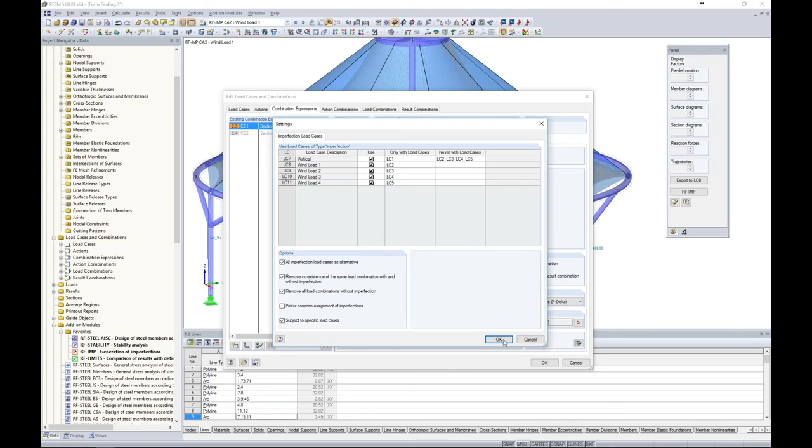Then under load combinations, you can see all of the different imperfections applied with their associated load cases such as wind load. For example, LC9 is the imperfection from wind load 2 applied only to wind suction at column. LC10 is wind load 3 applied only at wind pressure between column. So that's just kind of how we can apply those imperfections to the rest of the structure. Now, lastly, we can run an analysis, a code check here from our analysis according to the AISC module, for example.

Same goes with Eurocode or the CSA Steel module. Basically, I created two cases here just called beams. I checked all my beams and braces, and I am checking them against my LRFD load combinations. And keep in mind that this module looks very similar to our RF limits module. So once you learn one module, the rest of them are pretty intuitive to use, which is nice.

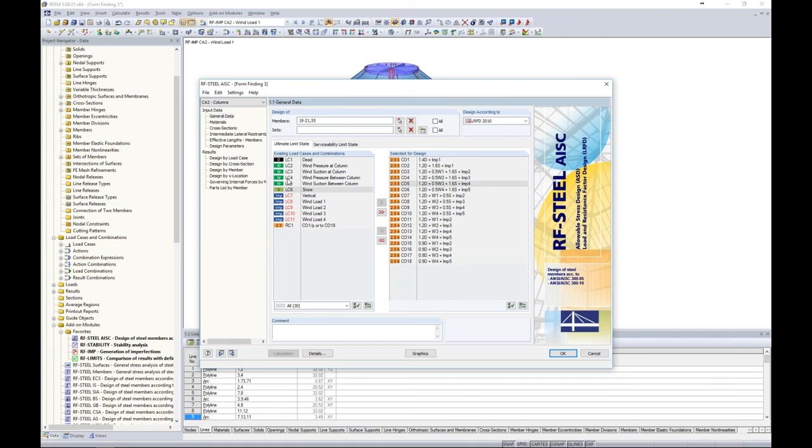And then I also ran a second case to take a look at columns here. We run our calculation based on these LRFD load combinations, and we get our code check directly from the AISC. So it looks like our columns are well below 1, judging by our big green smiley face here, and we also have our beams and braces at 0.73. We can view everything graphically as well to see that everything is below 1.0.

So again, this is just to show you guys that you can utilize all of these other add-on modules for a complete structure design. If we want to go back and take a look at our form finding, we can do so here with our membrane. So everything is tied together. Okay, so that really completes the overall structure design.

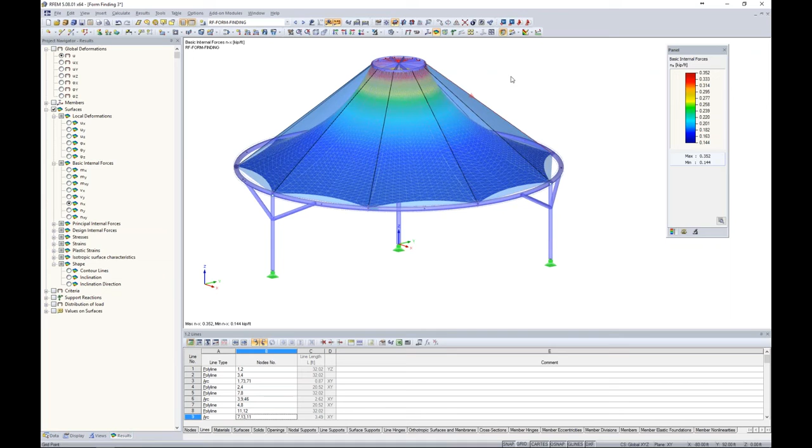Now the last thing to touch on is the RF cutting patterns. So for this, let's turn this into an elevation view and turn off our results. So as far as cutting patterns, remember we're trying to turn this 3D membrane element into a 2D pattern in order to give to the fabricator, whoever is going to be producing this membrane. And right now, these surfaces are pretty large for our 2D cutting pattern.

So we could take these surfaces and cut them in half, but that would require some remodeling, and it's not very user-friendly. So we have a nice feature in our Project Navigator that we can right-click under lines to create a new line. And again, this is what we saw at the very beginning of the webinar, but instead we're going to choose Cut via a section. So all this is going to do is apply it to surfaces 1 through 9.

We move on to the next tab, and I'm just choosing a couple points here of where to make my section cut. So for example, I can graphically choose up here at my origin. My second point, maybe we'll go with this surface right here. I'd like to choose the cut right down the center, so I'll choose my second point down here. The cut type will be a section, and the definition type will be according to a direction vector. So this direction vector can be something completely arbitrary. For example, I can just put 1 foot here in the global Z direction.

I click OK, and now you can see that that line was added to this surface element. This is still a single surface. It's just purely a line that was added. And what I can do is I can highlight this line, and I can use my rotate copy tool, which is the same thing that we've been using, but you can also right click on an element to utilize this tool.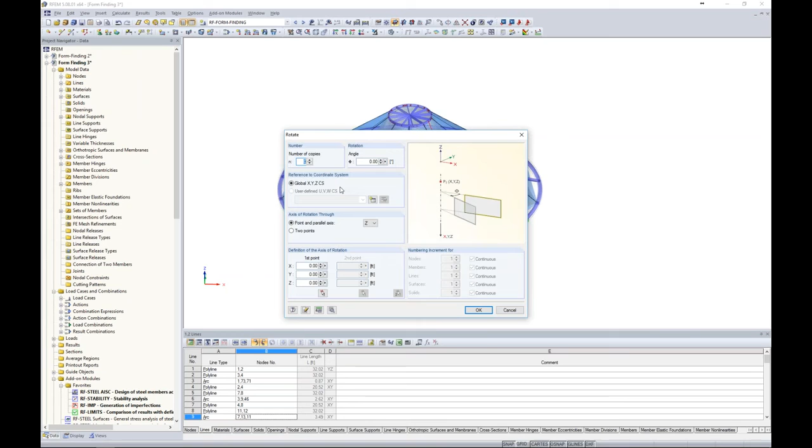Here I'm going to create 8 copies at 40 degrees. Make sure that my settings here are turned off. I click OK. And now the program is going to create a copy across all of my surfaces of just that simple line element. Nothing too complicated here. So now going back to my elevation view, I want to generate my cutting patterns. And for this, I just simply go to Tools, Generate Cutting Patterns from Cells.

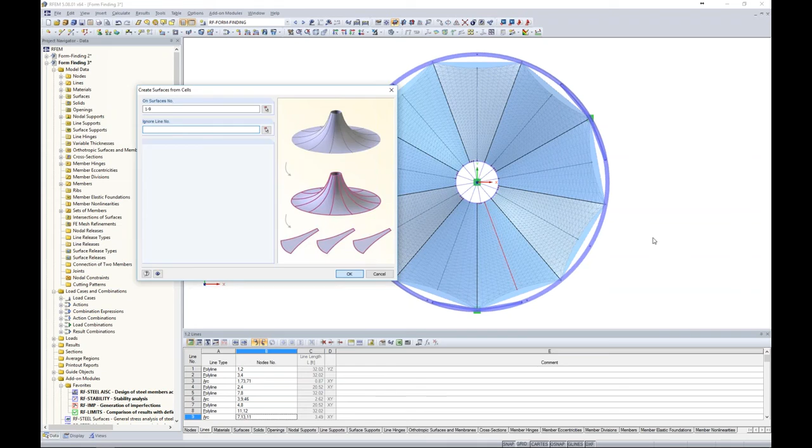Now this dialog box is very simple. It's asking me what surfaces to apply it to, 1 through 9. And do I want to ignore any of these lines? Well, no, I don't. I just added these lines to create smaller cutting patterns. So I click OK. And then the program generates these 2D cutting patterns. You can see this little symbol here that I can double click.

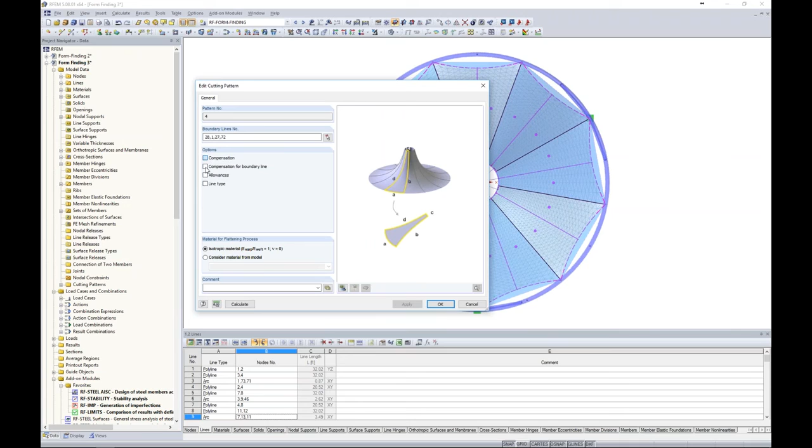So when I double click this symbol, it's quickly calculating through to determine the cutting pattern from a single membrane as far as the input data. So this is for pattern number 4, which we can see is highlighted here. And we have some options such as compensation, compensation for boundary line, which as we select these, we get these tabs that are populated up at the top. So taking a look at these tabs in particular, if we look at compensation, remember that these membranes are probably going to be stretched when we apply them to our structure.

As far as a 2D pattern, we need to take that compensation into account. We can do so whether that's standard in the warp or weft direction, and we can even apply it at an angle if we'd like to.

As far as the compensation, we can apply a percentage here, for example, in the warp direction or the longitudinal direction of 1%, and in the weft direction, the transverse direction, at 3%. So this is more of a uniform application to this 2D cutting pattern.

Under the next tab, different compensation by lines, this allows us to take into account different compensations for each line or boundary line, if we don't want to do so in a uniform manner like on the last tab. Here we have allowances, which are for welding lines or for border lines.

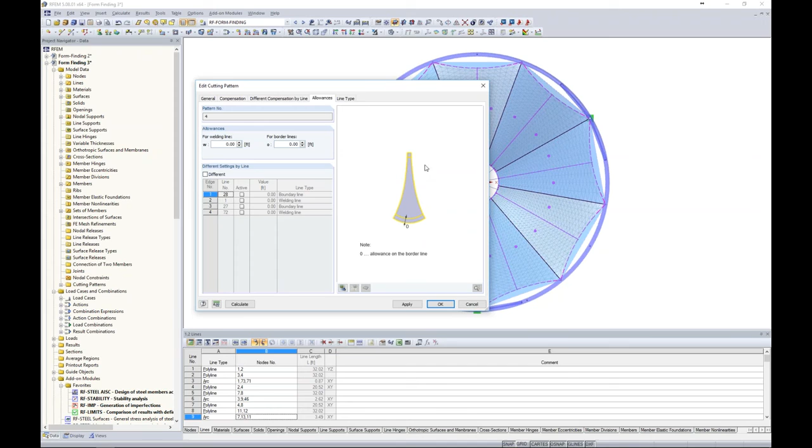For example, let's say at the top and bottom of the 2D cutting pattern we'd like to add 8 inches of additional material. We can easily set that by setting this to 0.66 feet.

Then down here at the bottom, if we don't want to globally set those again, we can check them on for a different application for each boundary line or welding line.

For example, taking a look at line number 72, which by the way, we can always activate our numbering for our lines back in RFEM and have those on in the background as we're looking within this dialog box, if we don't know which line number 72 is.

I'd like to activate this because my adjacent membrane may be overlapping this a bit. I want to add in 4 inches to this particular welding line.

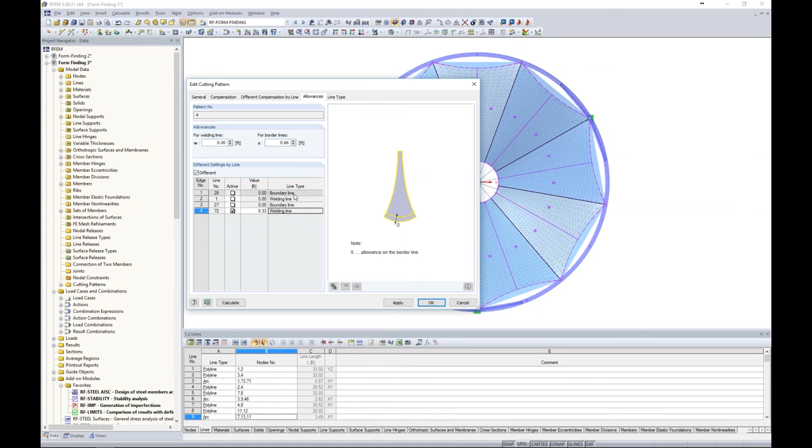The boundary lines are automatically calculated by the program. It's pretty smart with those, but if you feel that's actually not a boundary line, but should rather be a welding line, that's where the line type comes in - you can use your drop-down box here to change that.

So now that we're done with all of our input, we can click Calculate.

What I've done is I have an additional model here that I can launch, because for all of these different 2D patterns I set each one to have its own border and allowance additional width, and then I ran the calculation for all of my different patterns.

So now we get a couple different tabs up here, which is our 2D cutting pattern, and once we run the calculation, we get the X and Y coordinates for our 2D pattern here.

Now, this is a table, and as I scroll through it, it is synced up to my graphical view over here on the right. I can always zoom in, and it's all based around my origin right here at the center, about what these X and Y points are.

I can also turn on my global mesh here within the cutting pattern. Right now, this is without my allowances, so without that welding and additional allowance at the top and bottom. So I can also toggle that on.

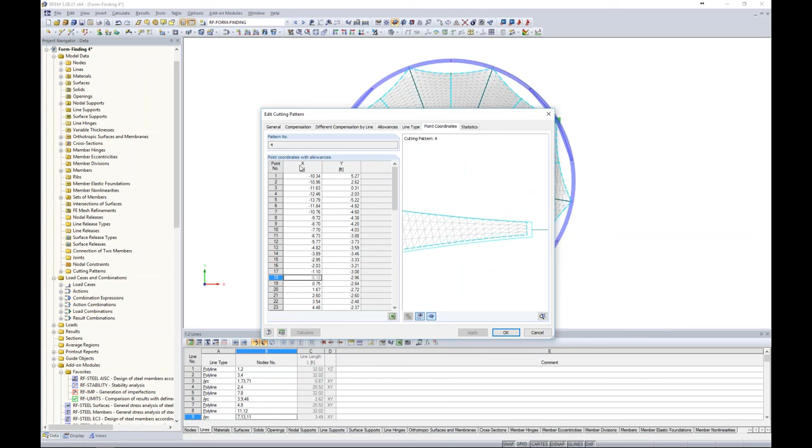You can see here's my 8 inches at the bottom, here's my 4 inches at the side, and my 8 inches at the top. And now my point coordinates here should reflect these different allowances taken into account, which if we zoom in here, we can see.

So here's our option to export directly to Microsoft Excel. I think this is a very powerful feature because obviously Microsoft Excel will have a lot more capabilities in terms of sorting data than what any structural analysis program could do.

So we give you that option to do so here. Under statistics, this just gives us our area - our 2D area, our 3D area.

We're turning this 3D area into a 2D area based on the minimum energy theory. We also give you the height and width of the 2D cutting pattern with and without allowances. So that's basically all as far as the output for the cutting pattern.

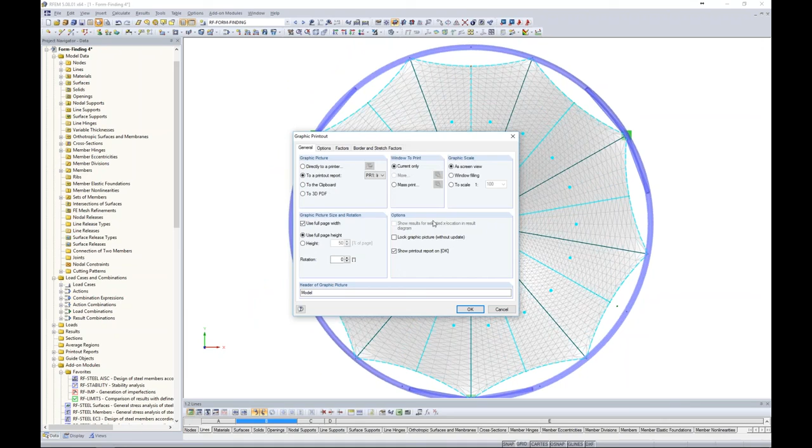Now, let's say we would like to generate this to our printout report, and we'll start with generating a nice picture here of our plan view. For this, I can simply print my graphic, and we'll choose the current view only, to use the full page width and full page height.

We click OK. So what the program's doing now is cycling through to create my printout report, and it takes just a second here because it's collecting all of the input data and all of my results, especially including my cutting patterns, and creating a printout report.

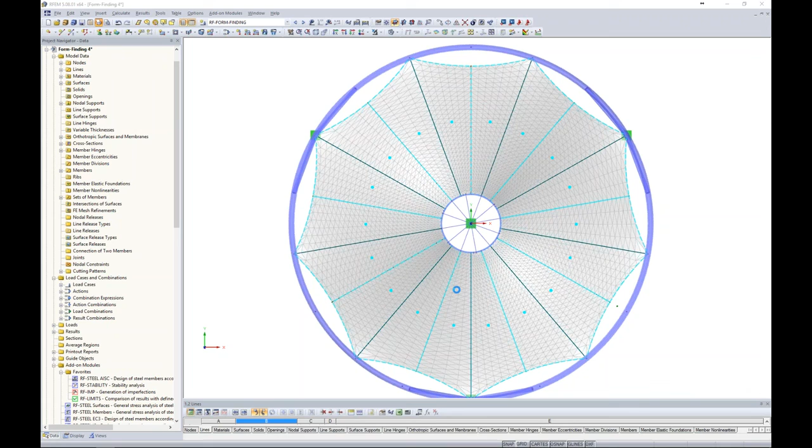So up pops this separate application. You'll notice that we have our table of contents on the left and our actual report printout on the right. Here's that picture I just generated, showing my plan view of my different cutting patterns. Maybe I'd like to move this to coincide with my cutting pattern point coordinates down here at the bottom.

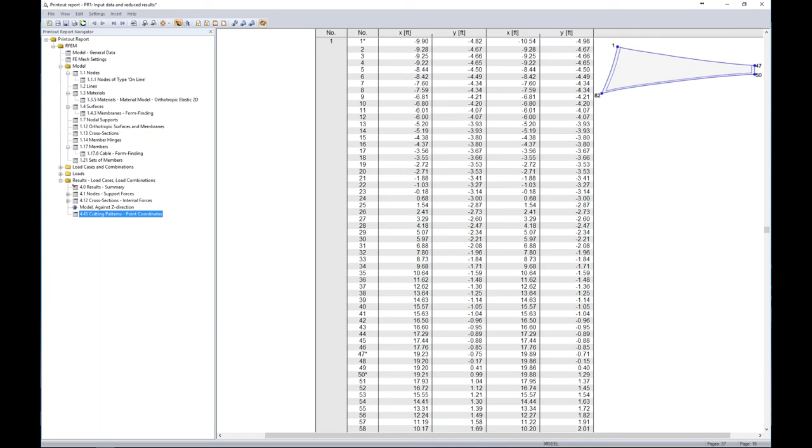I can easily do this by dragging and dropping it, and my printout report will automatically update. So I can jump down to that picture again, and if I scroll down, here is where my cutting pattern information is - my X and Y coordinates without overlaps, with overlaps. This is for pattern number 1. I have a nice little picture generated here with my node numbers, and I can scroll down to all of my different cutting patterns. So we're very powerful in how we can present this information in our printout report as well.

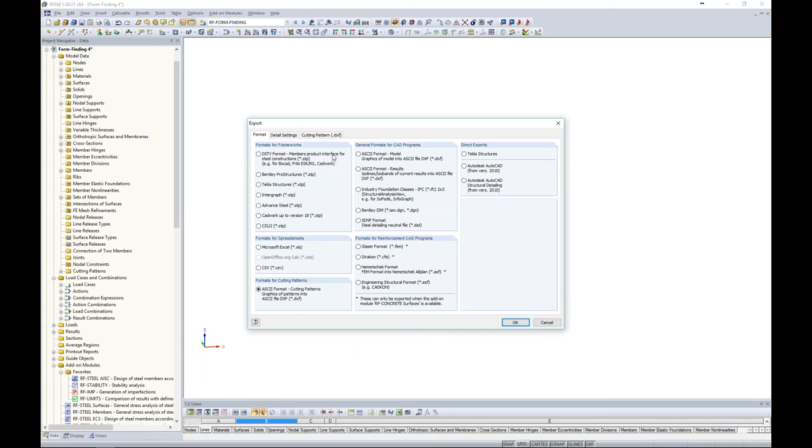So one final thing to show you is how to export this information to a DXF file. What we can do here is go to File, Export, and down at the bottom we have this option for formats for cutting patterns according to a DXF. Now we will have an additional tab populated here, and this is where we can export our cutting patterns.

And then we just give it a few parameters here, such as the number of patterns per row. I can set this to 3, for example. The distances between patterns can be set at 3 feet. Here is where we can export the 3D shapes or our overall structure. We can also export the cutting patterns FE mesh, or uncheck this if we don't want to see it. Lastly, we can export the 2D cutting patterns as 3D face elements.

So I click OK, I can save this DXF file, and what the program will do is cycle through and export this, and then up will pop a little dialog box telling me that the data export is complete - data successfully exported to file.

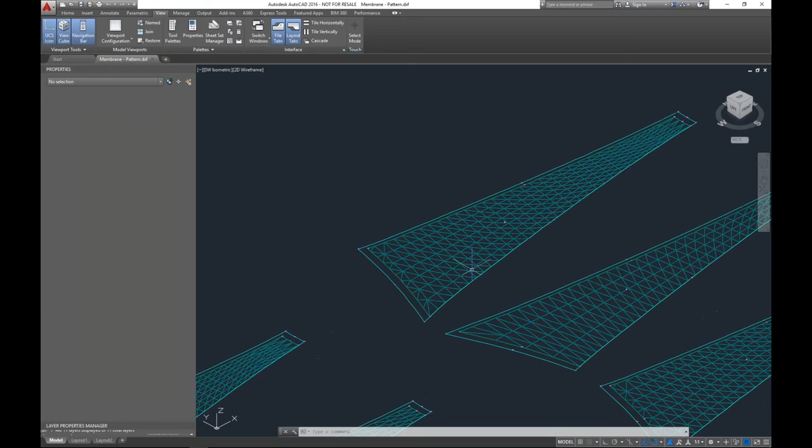So now in AutoCAD, what I can do is just open that file, which I already have saved here. This is just the DXF file that I just created. You'll notice that this is my model that I just created. Here is my 3D element, and here are my different cutting patterns. If I zoom in here, I'll see that each one is labeled according to the different cutting pattern that we had in RFEM.

We have our FE mesh that was generated, in addition to our tolerances, both for the welding line as well as the top and bottom offsets here. And of course, within AutoCAD is where we can add dimensions for these cutting patterns, because everything is to scale according to the point coordinates that was created in RFEM. So again, very, very powerful in terms of creating these cutting patterns.